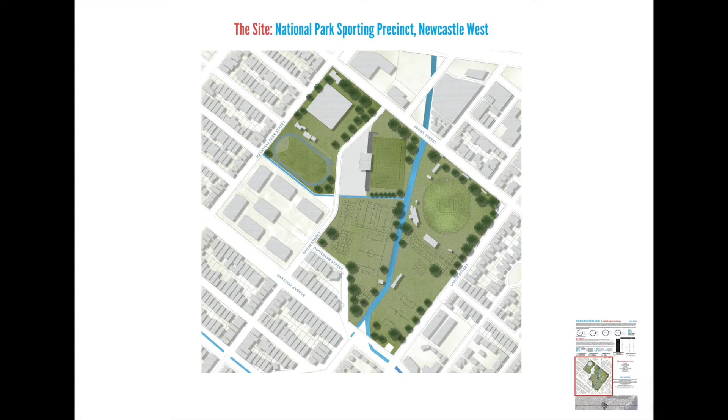Why Newcastle? Newcastle is Australia's 7th largest city, but one of only 2 from the top 25 to have never hosted a Big Bash League, AFL or international cricket match. Since the year 2000, only 18% of our national cricketers are from regional areas, while only 5 Novocastrians have ever represented Australia in cricket.

While women engage in exercise as often as men, their participation in organised sport and team sports drops off considerably. Only 2% of all athletes ever make it as a professional athlete, but shockingly, women make up only 15% of this figure. So how can a sporting facility in Newcastle help bridge these gaps?

Simple, by having the infrastructure in place to host matches and tournaments targeted to these demographics.

Putting pen to paper and shifting from research was hard for me, particularly when there was so much to take in. For a stadium, there are many constraints we must consider, such as the size and orientation of the field, the viewing angles, the sight lines, which are known as C-values, the angle of the stadium or the rake, and how many seating bowls you'd like.

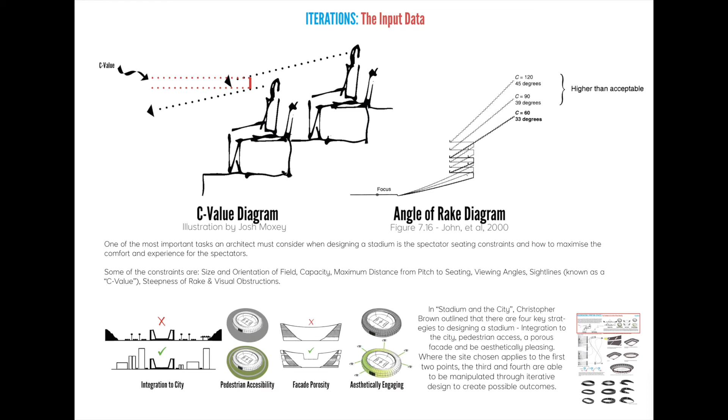Taking known data, I was able to place a set of data points into Grasshopper and begin to extrapolate different seating bowl options. I started looking at this data with a rectangular field as this was the easiest to begin with, but quickly found myself experimenting with many different configurations.

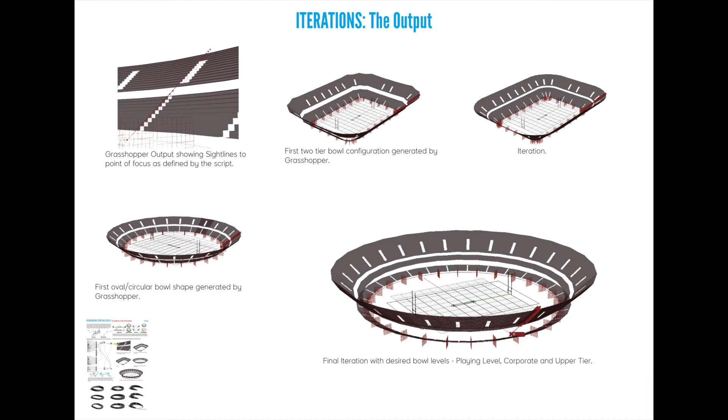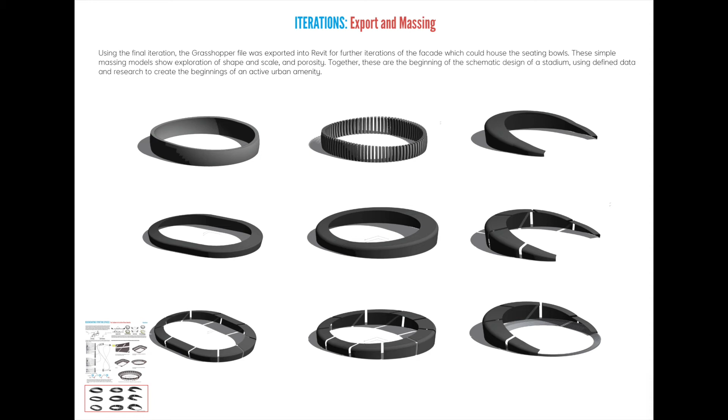From there, I was able to export preferred options to begin exploring massing models of what the facade could possibly look like. The design development of the site sees the addition of a new sporting field to replace the vacant tennis courts, the rejuvenation of Cottage Creek, a new stadium, and the reconfiguration of the other sporting grounds.

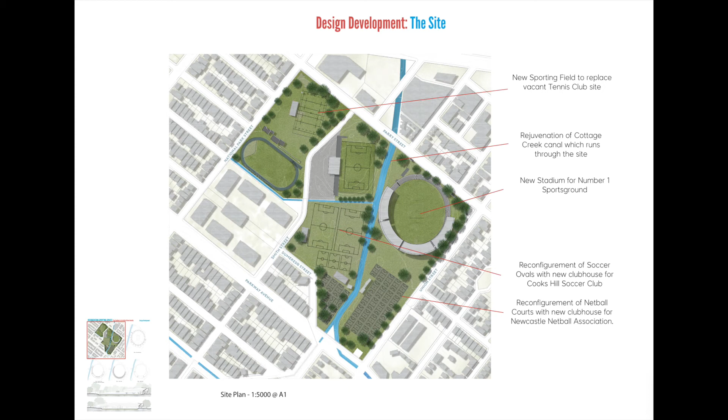The plan shows at ground level a full seating tier around the playing arena. This actually sits below the ground level.

Where many stadiums tear unsustainable holes in cities and isolate themselves from their surroundings, I want to explore how this facility could be the continuation of the street. By elevating the finished spaces like the media centre and corporate suites onto the second tier, it removes the chance of flooding causing significant damage to the structure.

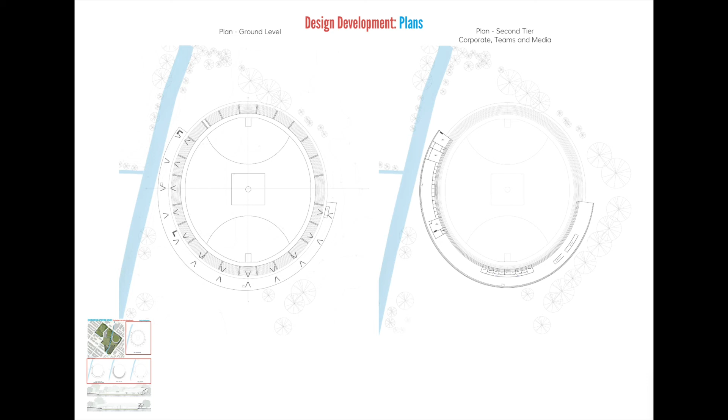A third tier for viewing completes the structure, which is orientated towards the heritage listed trees, the old scoreboard and Nobby's Headland, offering a view of the city never seen before. It also allows for the original hilled areas to remain.

The two sections show how the playing field has been dropped below the original ground line and does not overpower the site. Further exploration and development is required.

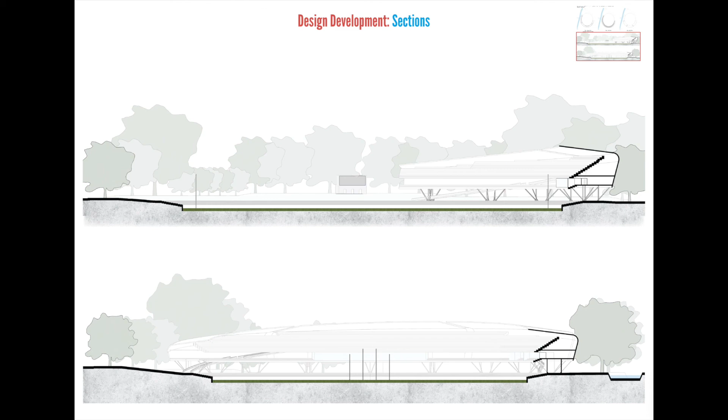Unfortunately, I was not able to build physical models. However, I explored the building topology through BIM models, which helped me understand just how challenging this project will be.

I've yet to impose materials onto the proposed design, but believe that aligning the material palette to the recent contemporary Newcastle buildings like New Space and the courthouse is how I will most likely approach this project.

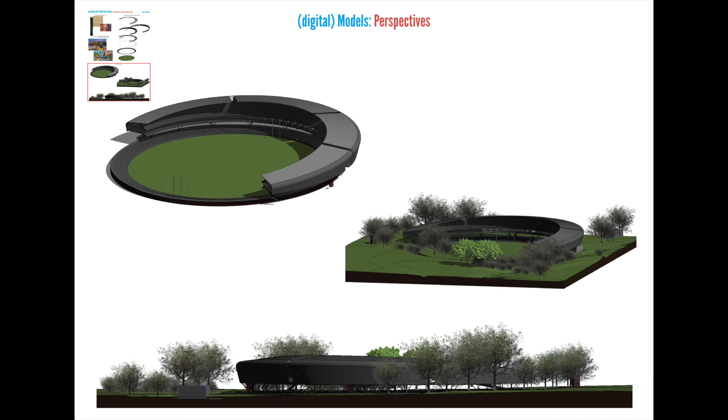Lastly, I hope to develop this design further to highlight that stadiums and sporting facilities can become of the city rather than simply being in the city, and become active urban spaces throughout the entirety of the year. Thank you.